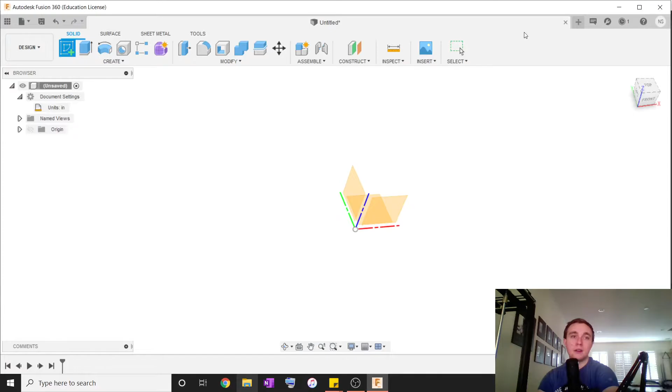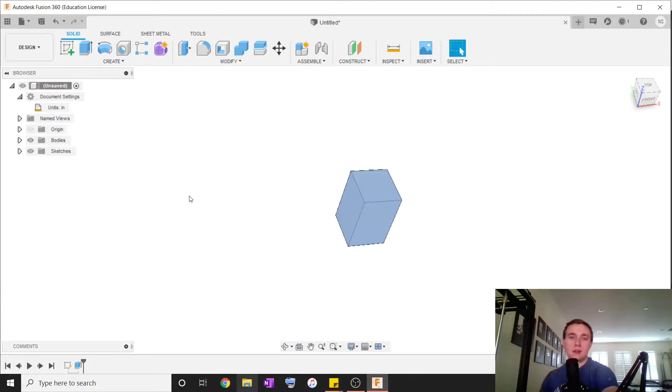The only reason you'd need millimeters is to save something as an STL, which isn't here because I don't have anything, but STL is what you use for 3D printing stuff. Just for reference, you don't have to do what I just did, but if we right click here, now we can save as STL, and that you put into a slicer so that you can 3D print it out, but that needs to be in millimeters.

We'll do all that stuff later, but for now I'm going to show you the mouse movements. So I have a cube in the center here. If you paused and followed along, it's easier to see, but when you hold down the middle mouse button, you can pan like this. And if you hold down the middle mouse button and press Shift at the same time, you'll be able to orbit like this. And zoom in, zoom out.

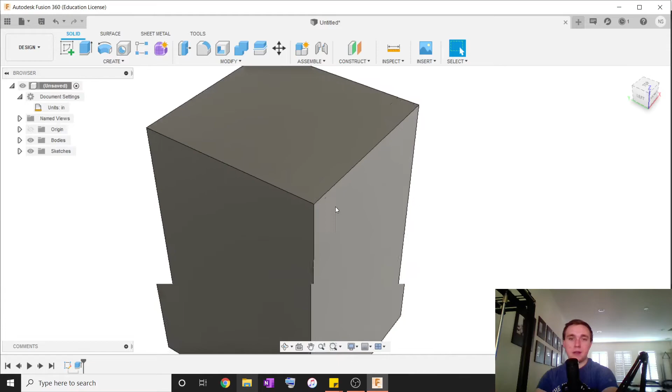This is important for navigating around the part, because chances are we're going to have to do a hydro flask or something big eventually, and then you're going to have a bunch of different sketches, some fillets going on here, maybe a shell or two, and then things get complicated. But for right now, we're just going to worry about extruding the 2 different types and just basic shapes, and then maybe holes.

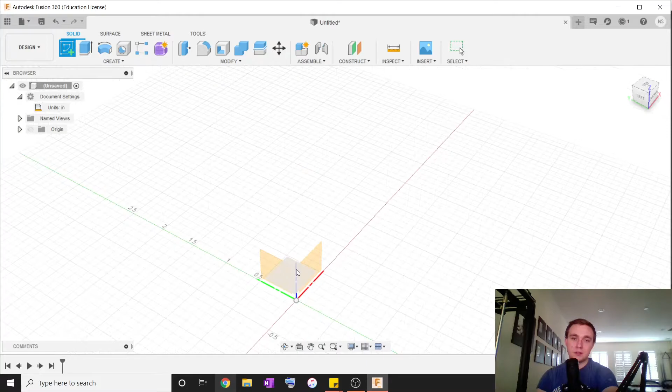So to create a sketch, that's a 2-dimensional object that we can later extrude out, we're going to go here, press create sketch, and you'll see these 3 planes. I always work off the top plane, so to ensure I'm there, I go to this top right cube and press top plane, and then I'm going to click here. And now this is what we have working with.

We're working off the top plane, and your toolbar will look a little bit different than mine because I customized mine to make it easier for me. You'll probably have these 3 and then these 2, I'm guessing, but everything is under this Create tab. If you click on it and hover over it, if I were you, I would pin the center rectangle right now because you use it a ton. So you just hover over it, 3 dots, left click, pin to toolbar, and that's this one right here.

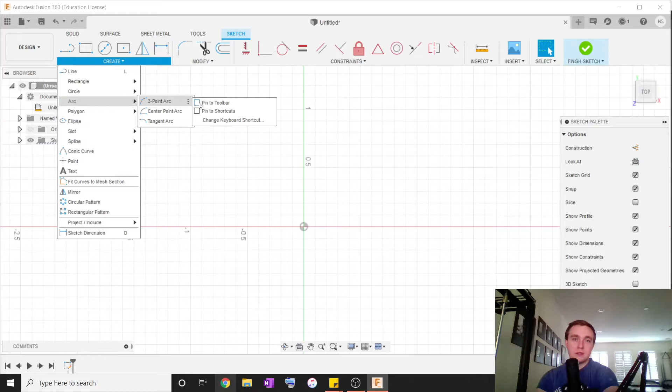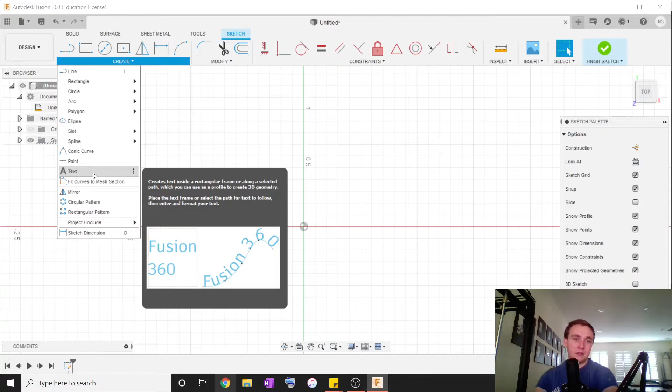Circles, I only really use the default one. I use constraints for everything else to define it the way it is. A 3-point arc is also pretty nice; I don't know if we'll have to use that as much necessarily, but it's good for arcing things. Then polygon, that's like octagons, a bunch of things that have 10 sides. And then an ellipse, I don't ever use these. Slot, a bunch of stuff basically, okay? There's even a text thing in here if you want to make a dumb thing in a cube - it just says Genius Award, and it's just that and a brick, you could do that.

But right now we're just gonna extrude out shapes.

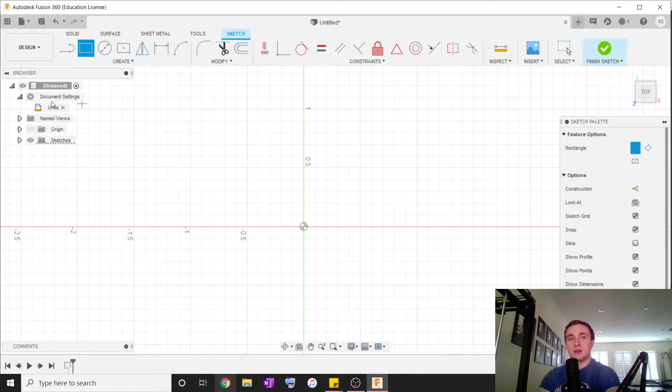So the 2-point rectangle is right here. I'm going to click on it once, make sure it's selected by seeing that it's blue. Then we're going to click on this origin, and then if we click once and drag it out with our mouse, not holding it, you can see that numbers appear. And what we want to do now is input the values that we want.

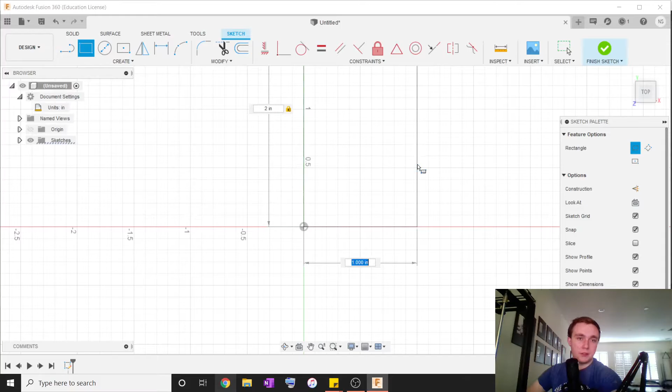So using my keyboard, I'm going to press 2, tab, 2. I'm really zoomed in, so that looks big. And then I'm going to press enter. Now we have our 2 by 2 inch cube. This is engineering based stuff, so everything is a 1-to-1 scale. So if you print this out, it will be 2 inches by 2 inches, which is important later on because you don't want to sit there and scale everything, because that wouldn't be great.

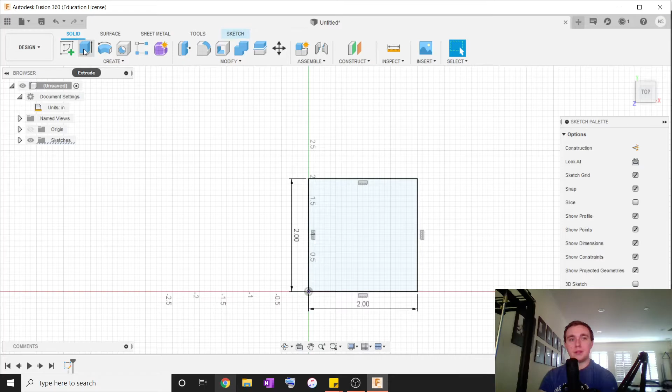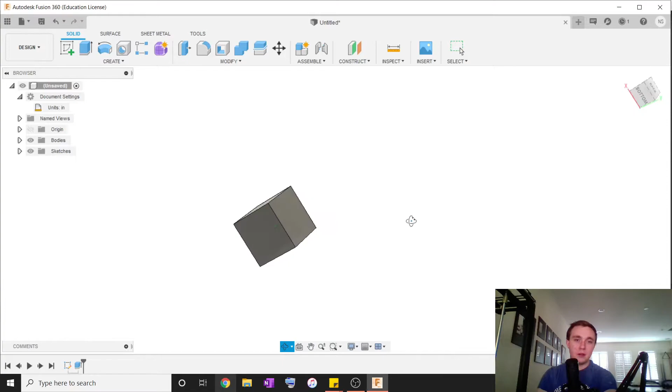Now to make this a 3D object, we're going to go under Solid and then press Extrude. If you didn't click outside of it, it will automatically be like this, but if yours looks different and you don't see an arrow, no problem, just click here and you'll see the arrow. Now we're going to make this a cube, so I'm going to press 2, and there we go, there's our cube.

You can see that the origin isn't at the center of this piece. It's kind of, let me find it. Yeah, the origin is right there, that purple dot. That's what the origin is. You want to make sure that the origin's at the center of the piece.

So to do that, we're going to change this 2-point rectangle into a center rectangle. I'm going to go down here at the tree, press Control and select these two, then right click and delete.

Alright, we're back. Had a bit of an allergy attack there, but we're back. Everything's deleted, and now we're going to do it with the center rectangle.

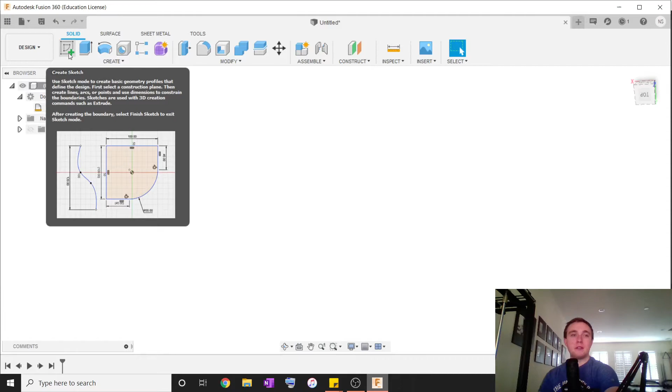Same thing, press Create Sketch, make sure you're on the top plane, press this one, and if you already pinned it, it will be here. If not, you have to go under Create, hover, and press the center rectangle. Then you want to click the origin, move it out, and you'll see that it bases it off the center. That's why it's a center rectangle.

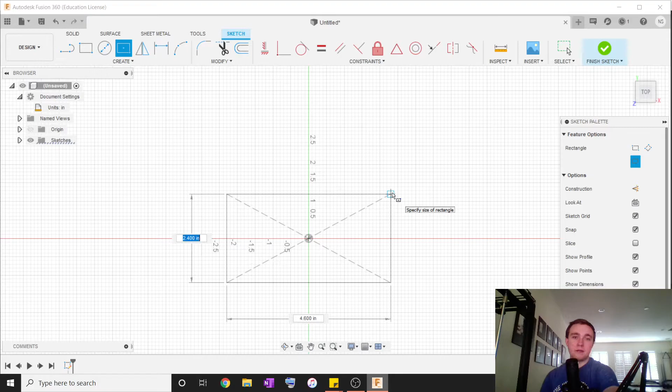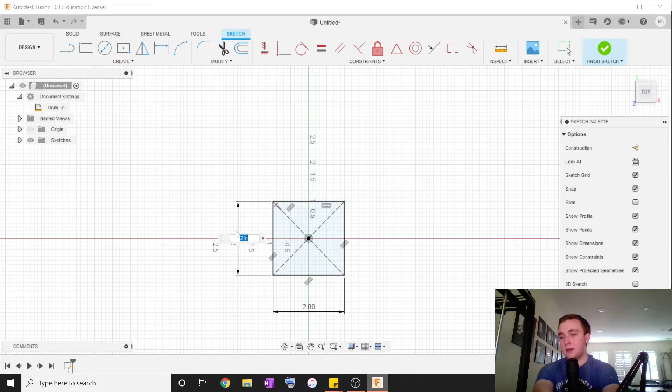We're going to press 2 by 2 with our keyboard and then enter. If at any time you mess up the number, you can either press Control Z and delete it and redo it, or you could just double click on these values to change it. Say you clicked too early and it was 1.2 and it looks like that, you just double click and press 2 and then enter, and there you go. No need to delete anything.

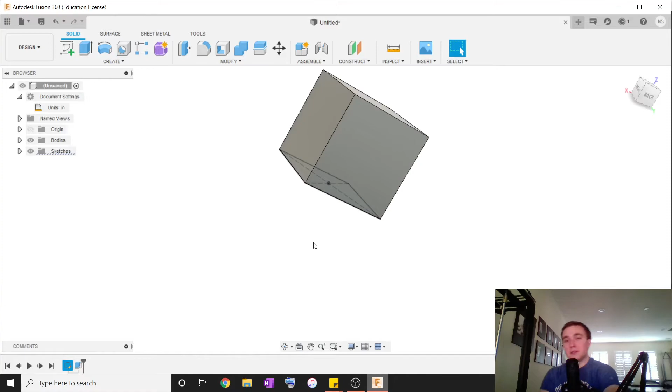So now we're going to extrude this out. Press 2. And you'll see that the origin is at the center of this piece, which is exactly what we want. Now, say we want to put a hole in this.

We're going to create, actually, there's 2 different ways to do it. I guess I'll do both. Alright, we're just going to put a hole in the center of this.

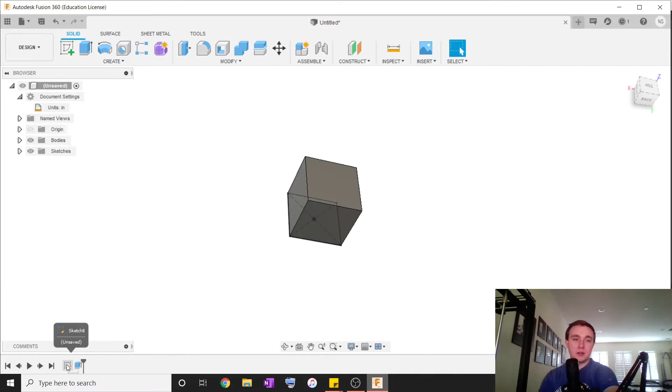So to do that, we're going to edit our sketch. It's a good habit to learn how to edit instead of just deleting things completely and starting over, which is pretty good at first because you'll be faster, but editing's the way to go. So we're going to double click down here on sketch. Yours will probably be 1 or 2, like the number that it says, mine's 8 because I've done this so many times already.

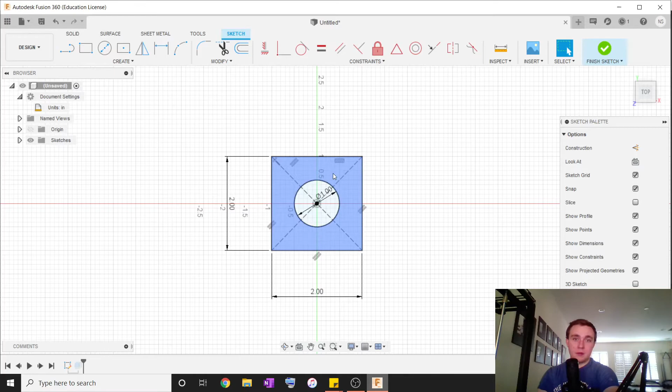But we're going to press on this circle here, go in the middle, and then, 1 inch. Press that, and there we go. You'll see that it's like this. If we press Finish Sketch, you'll notice that yours might already have the hole in it, and that would be great. But it doesn't for me.

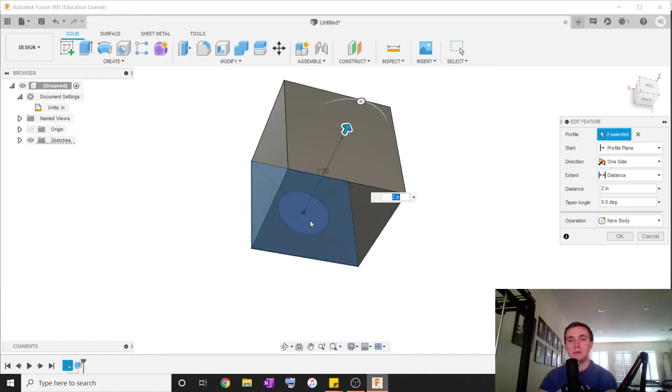So to change that, we're going to double click on Extrude, and you'll see that it actually extruded out the center piece, just making that hole useless because it's filled in. So we're going to click on it to deselect it. You'll know you have it selected because it'll be a lighter blue than the other color here. So we're just going to click that. There we go, we have our hole in the piece.

Now, what if we wanted a hole from here, there? So we wanted holes going on each side of this. We had a 1 inch hole. The way to do that is to create a sketch based off this part of the cube.

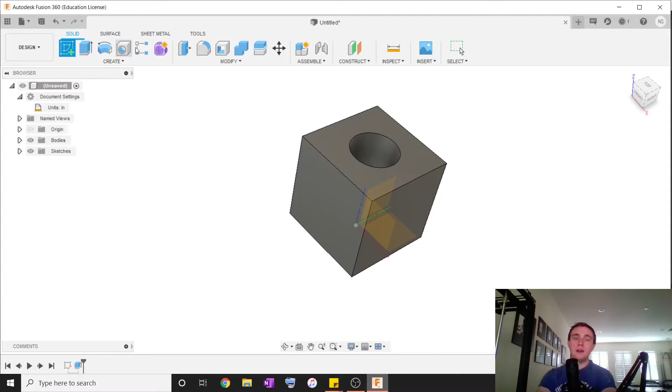Instead of going off these normal 3 planes, we're going to select what face we want to work off. So again, make sure Create Sketch is selected. And then click on the face we want to work with. It doesn't matter what one you choose, it just has to have one that doesn't have a hole in it already. We're going to click there.

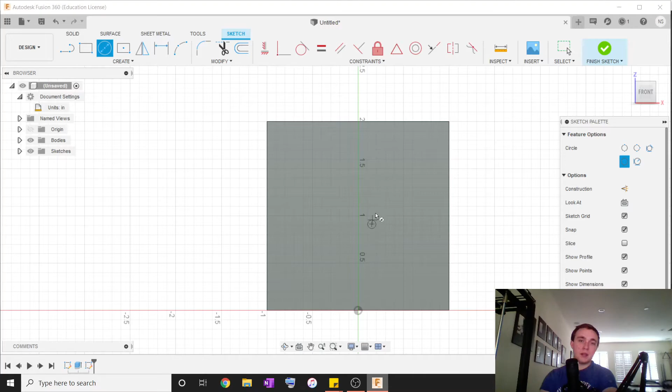And you can see that the origin's down here. That's fine, it just means we have to use the sketch dimension tool to make sure this is in the center. So I'm just going to make a circle wherever, and make sure it's 1 inch.

Then I'm going to go over here to sketch dimension. Click it once. This allows you to define the distance between things. It also allows you to change how big something is. Like if this dimension was deleted, we could drag it to make it as big as possible, but the sketch dimension constrains that to 1 inch. It also lets us put this in the center of the piece by just doing math.

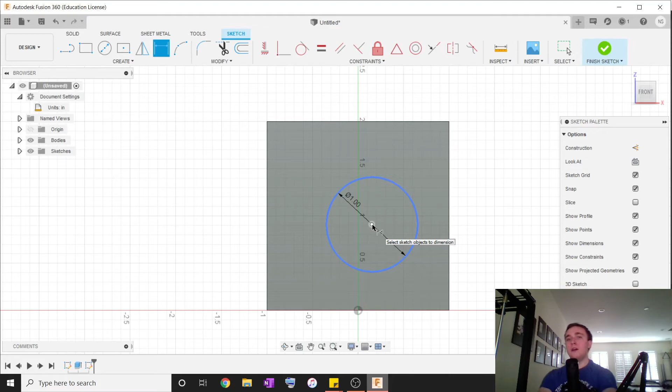The center of this piece would be at the coordinate 0, 1. So we're just going to click anywhere on the circle, it doesn't matter, you can even click in the center. Everything's going to be based off this point anyway.

Click it once, then click on this edge, drag it out, and you'll see this number, or one similar, with 2 arrows between it. If you don't see that, it means you misclicked, so press escape and try again, carefully looking at what I'm doing.

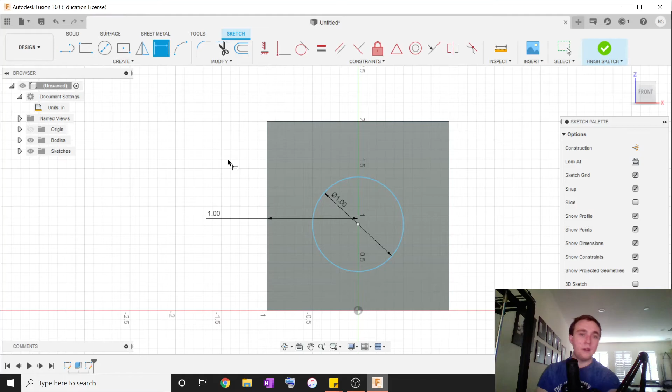Click there, and we'll make it 1 inch. We're going to do the same thing to the top. There we go, now it's in the center of the piece. You know you did it right if you see these same numbers and everything's black. When things are black, it's fully defined.

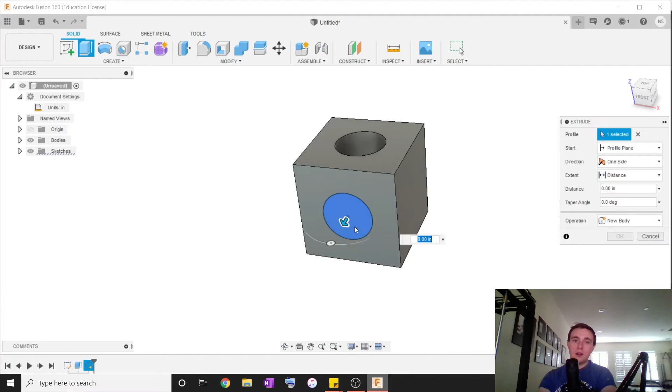That's what you want. So now we're going to go over to solid, and punch this hole out. You see if we drag it this way, it makes some sort of post looking thing, but if we instead drag it the other way, it'll cut.

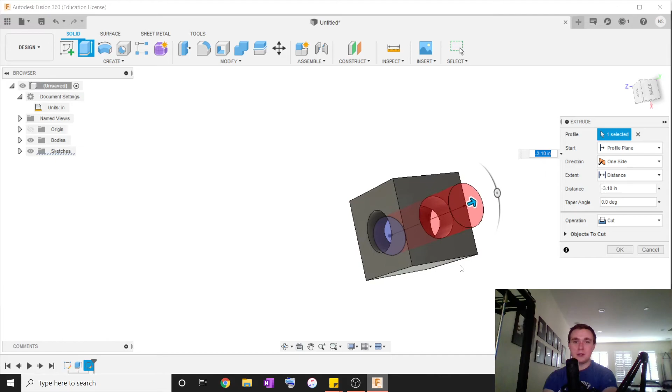If you don't want to drag it, you can put in the negative number or press cut, but dragging's totally fine, I've been doing this for a few years, no problem doing it that way. Then we're going to press OK, and you can see we're almost done.

To do the last one, we're just going to do the same thing we did on that side, to the top. Actually, let me orient this correctly. This was our original one, this was the one we just did. Now we need to rotate it 90 degrees and do it here. So we're going to do that real quick.

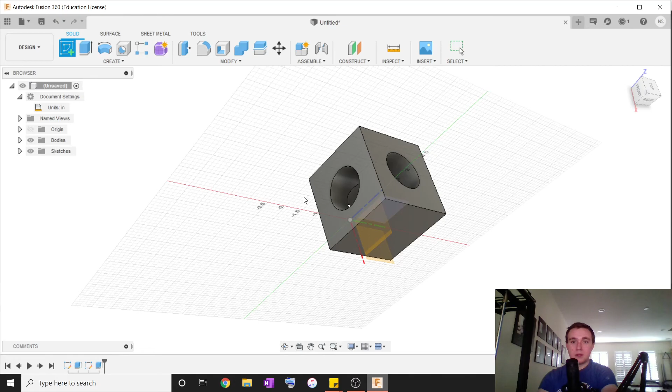Okay, that was odd, I don't know why it went there. If that happens to you, just exit and delete it by pressing delete on the keyboard, not backspace, that won't do anything, or you can right click and delete. But we're just going to create a sketch here, and base it off this face.

Again, just putting the circle wherever we want. My computer is not liking this, I'm not sure why, it does this all the time.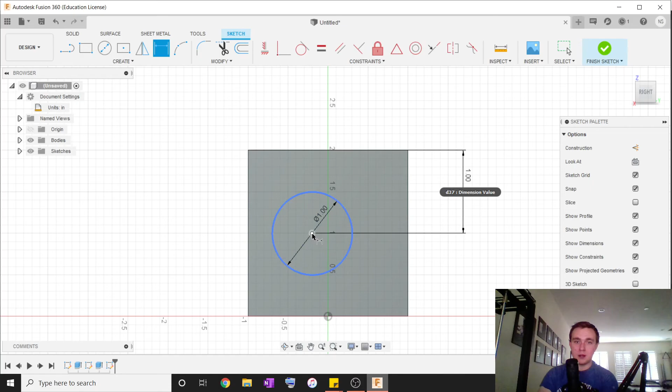We're just going to define it in the center of the piece again, by clicking the center, then this edge, then 1. There we go, the hole is in the center of the piece. And again, I just pressed extrude, selected this, and pulled it out. And there we go, we now have a hole everywhere.

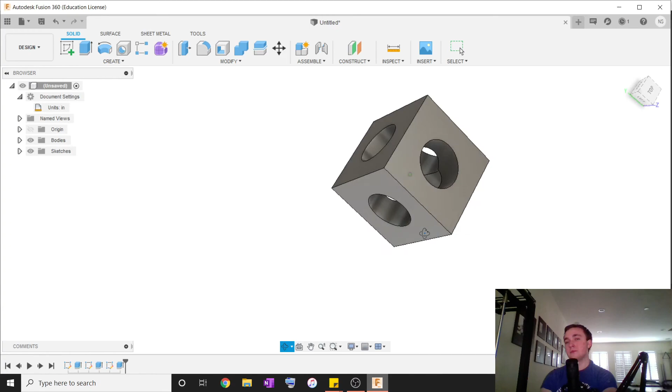That does it for this tutorial for how to do things basically. At this point, you could probably mess around with it. I gave you enough to sort of get started. It's really hard to think of what an amateur could do.

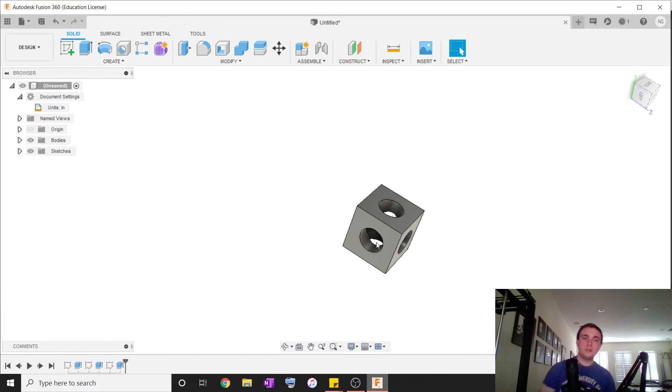That I did after learning the software for about 35 minutes. It's just the more you mess around with it, the easier this will be. But if you want the bare minimum and just want to go with the class, it's fine too.